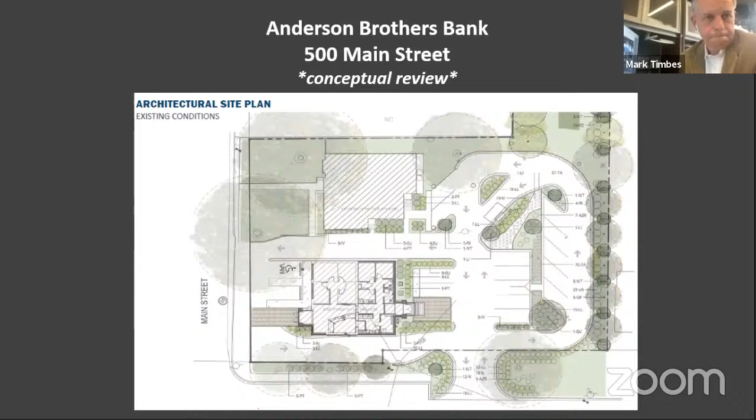So what we reconfigured is to start with the oak tree and really take out that existing exit drive. You can see it hatched in lighter green there between the bank and the tree, and create a much larger, softer landscape bed around the oak tree.

And to move the teller, which is currently on the Fifth Avenue side of the bank structure, to the north side, creating a teller pavilion that would replace the house. This allows us to consolidate the stacking that occurs at the teller right now, which creates traffic challenges off of Main Street, because cars coming out off Main are challenged by how to get in line if there's more than a few cars there. This would remove that and move the stacking to the rear of the property.

It would increase the buffer zone to the adjacent property to the north, and as I said before, increase the buffer around the oak tree and along the north side of the existing bank. We would actually be removing two parking spaces in this, but we realized in conversations with the bank that they don't have a parking problem—they have a drive-through problem and a traffic flow problem. So this was a way to solve all of that and actually reduce the parking on the site, but increase the ability to manage traffic much better using the back portion of the site rather than the front, which is what traffic flow currently does with the drop-off.

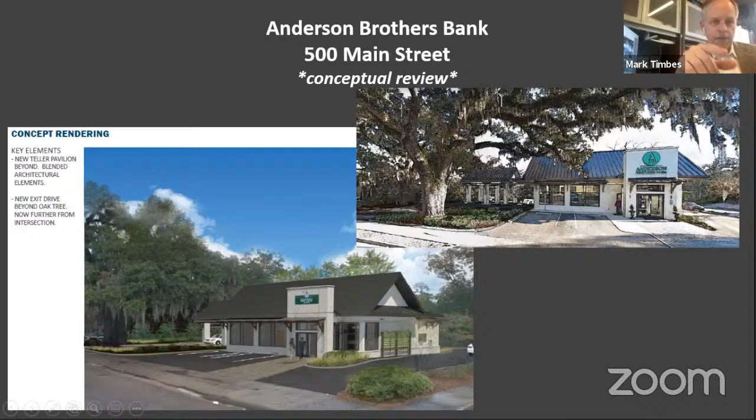If you go back to the site plan, that's an important thing I glossed over. The bypass lane, if you think about most banks, is usually on the far outside of the teller pavilion stacking, so you can get around in case you change your mind or have to leave the line you're in. This one we're flipping and centralizing so it can also serve the parking that's already behind the bank. Rather than building congestion or a dead-end parking area, we wanted to keep traffic moving, so someone can leave through that bypass lane from the lower parking area, or bypass the teller lanes as well. It centralizes and gives an exit point for everyone.

So a sign that would say 'exit to Main,' they would know to use that lane? Yeah, we would. So signage is crucial for this.

So a two-car pavilion? You'll see actually three teller lanes. There are 3 columns, so 2 lanes under the structure. The third lane is just outside the structure, but it has a cantilevered roof awning over it, similar to the ones on the bank, so they're all covered. We wanted to keep the scale somewhat intimate rather than building the same pavilion to cover everyone. The pavilion is actually smaller, covering the 2 center lanes, and the third lane is covered by an extended canopy, keeping the scale smaller.

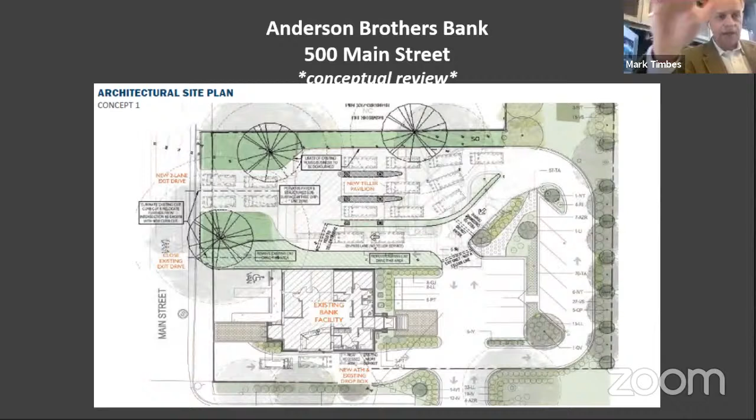I guess, obviously I don't read the plans well, I just can't tell. If you look at the house and the brick pathway, will these 3 lanes for cars all feed into one narrow, driveway-size exit, or will it be different? That's a great question too.

I'm just wondering, for size and scale, if you're going to have these 3 lanes—and I like the idea of it bottlenecking very narrowly back out into Main—but I don't know if that serves your traffic issue. I'm just curious.

That's another great question, you're nailing all the great ones. That's why you're down here at the bottom.

At the bottom, coming in off Fifth, you can see a typical 2-lane entrance and exit width, and that's a similar width we're showing leaving out at Main Street on the far left, above the oak tree. We were actually in discussions with DOT on this in early stages. They've also gone out to the site, so we expect another conversation with them after that. There are 2 floating concepts here, so it's not fixed in stone.

The 2 lanes that are there would allow a left turn or right turn, keeping traffic flowing out of the queue lines. You don't get a bottleneck behind someone waiting to turn left who can't, and we all know what Main Street traffic can be like at certain hours.

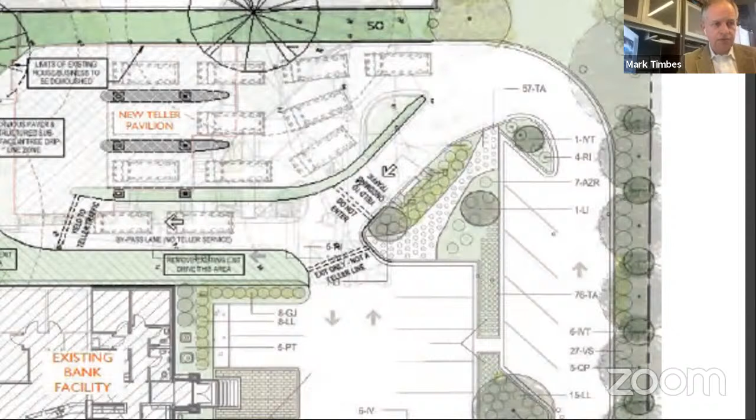Okay, where people are coming in now, correct? Correct. So the only thing that changes on Main Street is the existing exit drive that's on the south of the tree moves to the north of the tree. So you're not changing the entrance drive? Not the entrance drive, correct. So you'll have one on Fifth Avenue as well as the same one on Main Street? Yes, the entrances to the site remain as they are today.

Okay, because I hear you saying that new positioning of the ATM will possibly limit the traffic, but what if it doesn't? Because that is a huge backup there now. I guess extending it or adding the pavilion for the tellers will help, but what if you still have a backup at the ATM? I don't know.

Well, the one thing about that spot—and I hate to put so much weight in a traffic study because it is just a study—but I think the reality is there's not a way to fudge the stacking there. It is what it is. You get four cars and that's it, you can't have a fifth. So if someone sees that stack up, they have to move around and either come back again or do something different, because there's no way to cheat it.

This has nothing to do with you or Anderson Brothers right now, but you have the traffic backup going into Anderson Brothers, and you've got the traffic backup going into South State, which is bad, because they're going into their teller on the backside. Yes, and it queues from the upper parking lot and that Main Street entrance. Correct, so they're both two-sided queues.

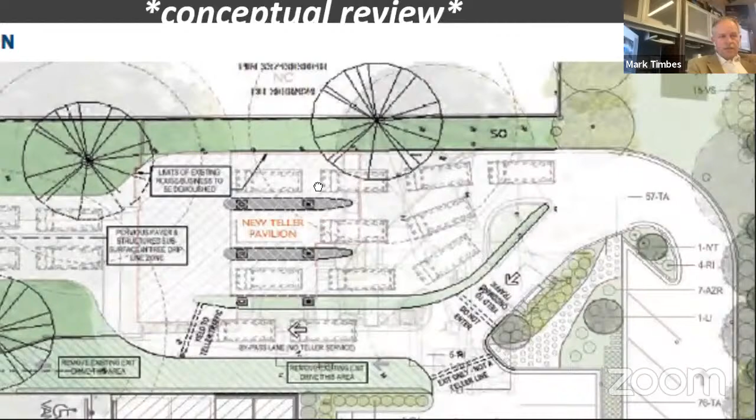There's actually a little width to it, if you can zoom in on the teller lane. On the existing teller lane at the bottom, there's a quasi bypass lane there. It's real cozy, it only works if there's one or two cars in the lane. Once you get that third car, it pinches too tight to get around.

What we've seen happen on the site is if there's only two cars in the lane and they are parked reasonably close to the building, you can get by as a bypass. So we have seen people in the front spaces pull around the side and leave, even though there may be one or two cars in the teller lane, for an easier exit. It doesn't work with 3 or 4 cars in the lane though, as opposed to pulling straight out on Main.

So those were DOT negotiated spaces, primarily out of the need for an accessible space on the zero entry level of the property or the building. We're over 3 feet up on the back.

Well then my comments would really just rest on whether the property to the north is truly demolish-worthy, but I have no problems with the proposed plans.

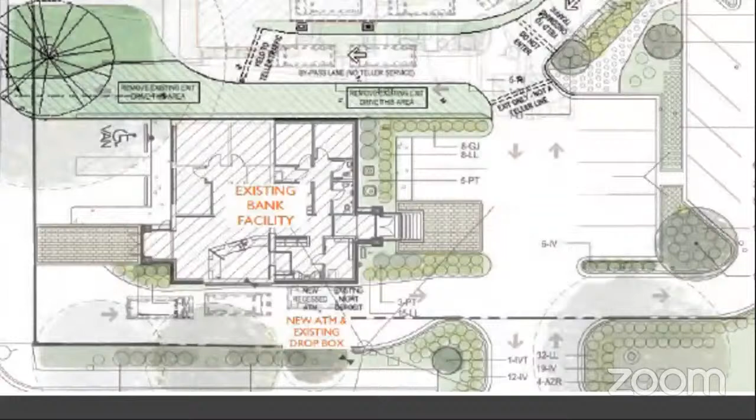Well, it tells me what we need to submit for the next round. We'll do more history gathering on the existing structure and have that better prepared for you. Apologize for not having it today.

I mean, it's not ever been a really beautiful building. No, we just need to make sure. But I mean, Troy, that's within our purview at this point. Do you need that history? I would like to see it. I think it would help in order to justify a decision moving forward.

So, if you wouldn't mind just having that for us next time you come in. We will provide that.

Any other comments, anyone? I just had, sorry, go ahead, Duck. I just want to say that I want to thank you for, as usual, y'all do a lot of extensive planning, and that's good. I appreciate that. It helps make it a lot easier for all of us, doesn't it? Yes, yes.

My last comment was just about, I'm curious if the bank customers, when going in and out of the bricked-over pathway on Main, do you have very many people actually use that door? Is that the main entrance for foot traffic, or do people typically use the back? I'd be curious, just because as Troy was saying, there's a lot of hardscape there, and I feel like I'm always seeing people drive in, like you said, using the bypass lane. It's sort of a big, just like a hornet's nest of people and pedestrians.

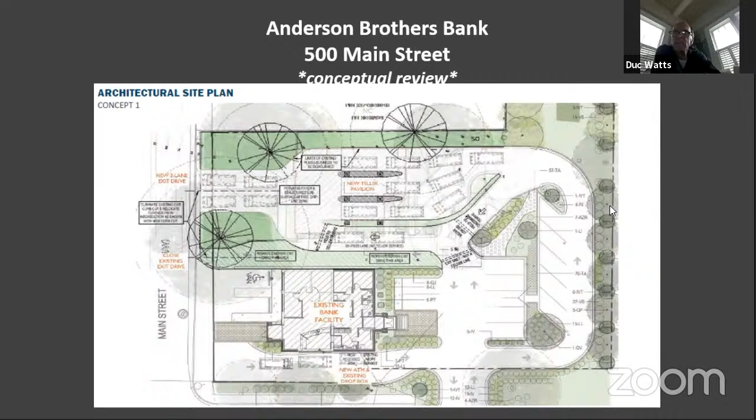All right, Duc, you got anything else? Yeah, Jamie, your front porch is looking good. Thank you, they got the rest of the handrails up today. It does look a lot better, and it's in much better shape than it was.